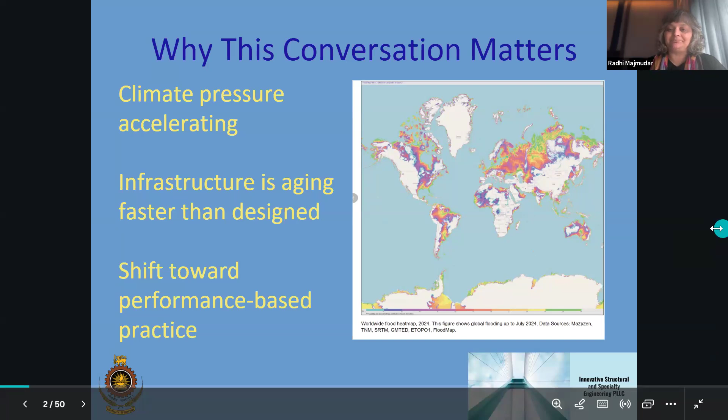Structural engineering today extends far beyond strength and serviceability. We now shoulder responsibility for sustainability - reducing embodied carbon, prolonging lifespans, selecting materials wisely - and resilience, meaning our designs must withstand and recover from extreme events. Sri Lanka's recent hurricane-level storm shows us how important load paths, anchorage, foundation robustness, and redundancy truly are.

At the same time, digital integration is becoming unavoidable. Sensors, real-time monitoring, machine learning-based demand prediction, and digital twins are transforming how we manage structural performance. As emerging engineers of Sri Lanka, you will navigate these overlapping domains, and your ability to integrate them will define Sri Lanka's infrastructure future.

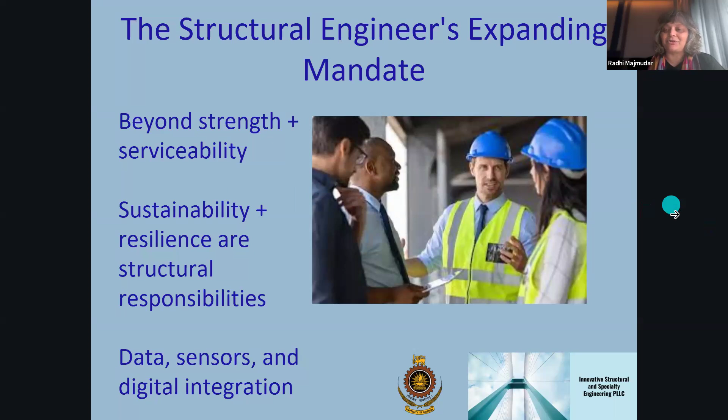From prescriptive to performance-based design: for decades, most countries relied heavily on prescriptive codes - fixed formulas, minimum reinforcement, allowable stresses. But climate variability, urban complexity, and longer operational expectations are making prescriptive rules inefficient or insufficient. Performance-based design is growing globally because it allows engineers to tailor solutions to anticipated hazards, user needs, and long-term outcomes. Owners increasingly want measurable metrics - reduced maintenance cost, reduced carbon, better service continuity, and shorter recovery times after disasters.

ASCE COS 73 is part of this shift. It asks us to define sustainability and resilience goals at the beginning of a project, and then to prove through documentation and analysis that the design meets these goals. Sri Lanka's ongoing recovery absolutely aligns with this approach.

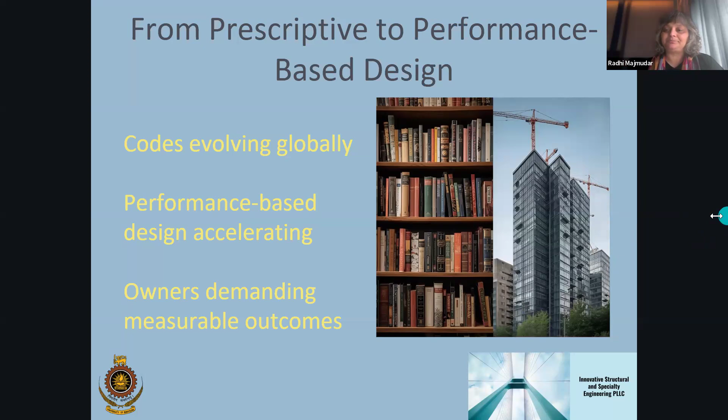The built environment is under intensifying pressure from all sides. Climate hazards - cyclones, extreme rainfall, coastal flooding, heat waves - are increasing in frequency and magnitude. In Sri Lanka, the combination of dense urban development, floodplain encroachment, and steep terrain amplifies failures. The recent storm exposed how secondary effects such as drainage blockage, soil saturation, and cascading slope failures can multiply rapidly.

Meanwhile, society expects longer facility lifespans, yet structures worldwide are degrading faster due to environmental stressors. This mismatch forces structural engineers to rethink durability, maintenance planning, and material selection. The solutions must extend beyond strengthening structures - they must include systems thinking across drainage, land use, social vulnerability, and climate projections.

Whoops, I'm trying to - there we go.

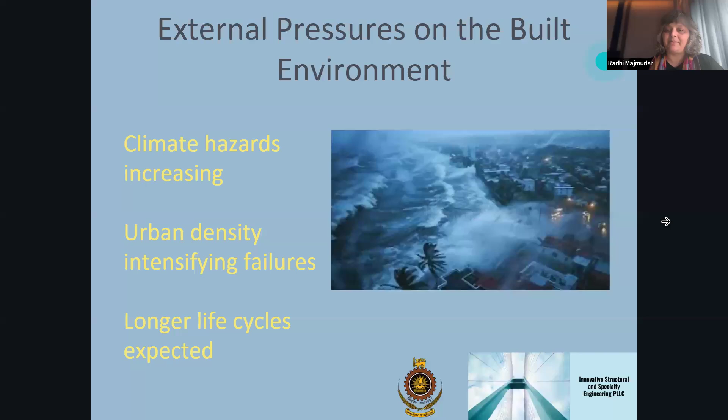So here's today's session. First, I'll discuss sustainability in structural engineering - what it actually means for material systems and design decisions. Then we'll look at resilience strategies and how to design for hazard uncertainty. Then we'll explore ASCE COS 73, the new global sustainability and resilience standard influencing procurement and design practices worldwide. Finally, we'll connect these concepts to Sri Lanka's recent storm impacts and how digital tools can support climate adaptation. Each of these sections is linked, and together they form a framework for the next generation of structural engineering.

Whoops, having trouble moving the slides.

There we go. All right, so here's a little bit about my background so you understand the perspective that I'm bringing. I guess we all have our own perspectives and our own exposures and experiences.

So I have been practicing for 35 years, and I've had the privilege of working across many continents - I would say five continents - on performance-driven projects, from earthquake systems to offshore structures, adaptive reuse, and complex glass systems, load-bearing glass, like the TKTS booth in Times Square, New York.

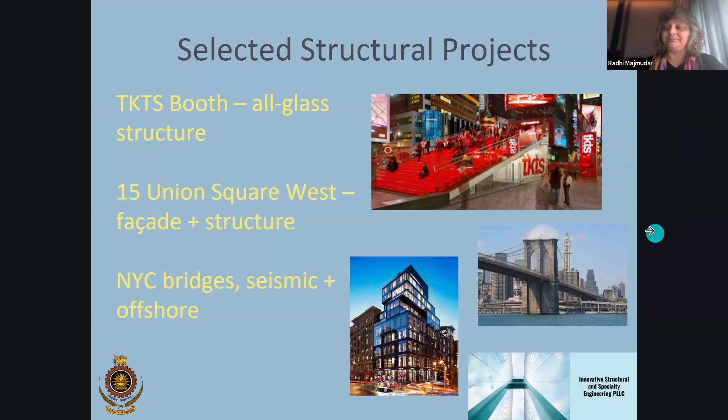After the severe rains and the cyclone that you just experienced this week, we can see the value of nature-based systems—wetlands, retention landscapes, floodable zones—that relieve pressure on drainage networks. When engineered and ecological systems work together, communities gain resilience. These projects taught me the importance of hydrology and geomorphology in engineering, knowledge that is extremely relevant for Sri Lanka as flood events intensify.

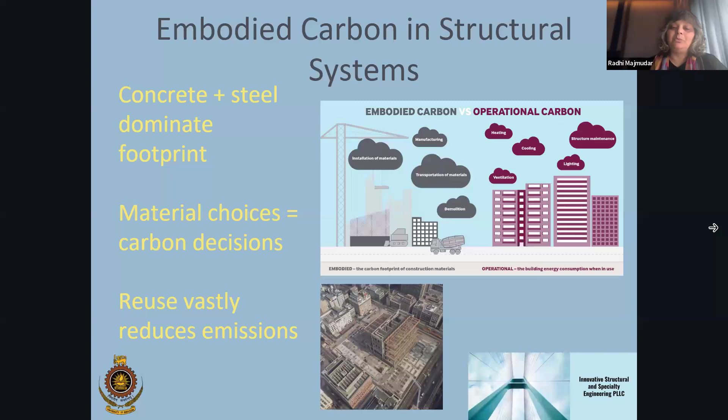Embodied carbon in structural systems: concrete and steel dominate global embodied carbon. As structural engineers, we often control 60 to 80% of a project's carbon footprint through system selection alone. Material choice becomes a carbon decision. One of the fastest ways to reduce emissions is through adaptive reuse: preserve what already exists, reinforce it intelligently, and extend its life. Sri Lanka, after the storm, will rebuild many structures, and embedding low carbon thinking now will pay enormous long-term dividends.

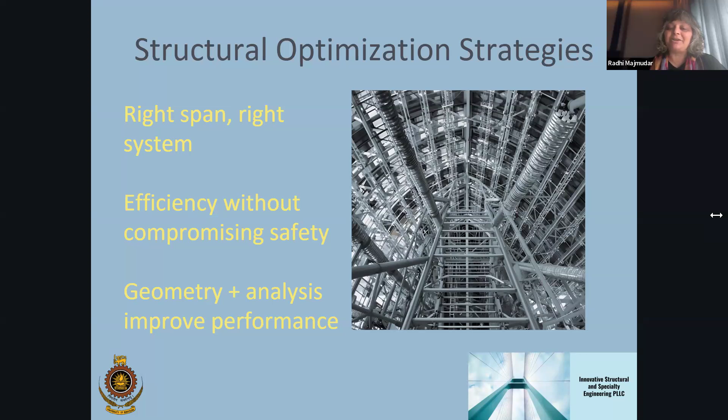Optimization is not about making structures lighter at the expense of safety. It's about choosing the right span, the right form, the right material, and the right load path. When geometry and analyses are used intelligently, especially with digital tools, we can improve performance while reducing carbon. Parametric design, automated load path analysis, and machine learning informed design exploration allow us to test hundreds of possibilities quickly, something earlier generations could not do.

Adaptive reuse and retrofit are often where structural engineers can make the largest sustainability impact. When we preserve an existing frame and upgrade performance, we avoid the carbon and disruption of demolition and new construction. The structure becomes a kind of carbon bank that we continue to use. For designers, this means learning how to evaluate existing capacity, identifying bottlenecks, and introducing new load paths or stiffness only where needed. It may involve new diaphragms, supplemental bracing, local strengthening, rather than wholesale replacement.

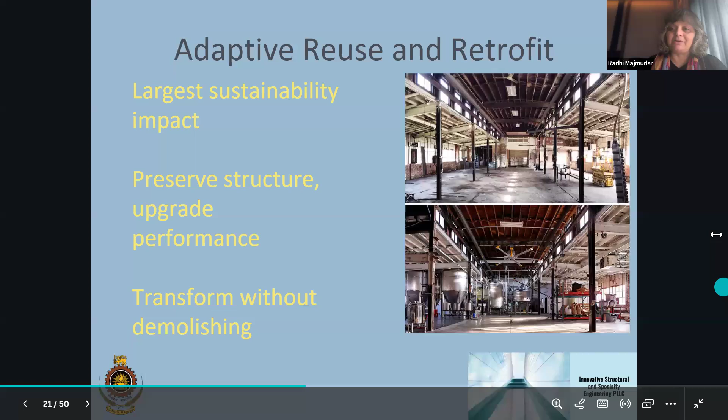So long-term performance is where many otherwise well-designed structures fail. Corrosion, moisture ingress, fatigue, poor access for inspection can all shorten service life. For a coastal and monsoon climate like Sri Lanka, detailing is as important as member sizing. As structural engineers, we influence durability through cover, drainage paths, coating systems, joint details, and we influence maintainability by providing safe, logical routes for inspection and repair.

COS 73 and similar frameworks ask us to think about performance over decades, not just on opening day. If you design with maintenance in mind, clear inspection points, replaceable components, realistic access, your structures will perform better and cost less over their lifetime. Durability is not an add-on, it's a core part of resilient and sustainable design.

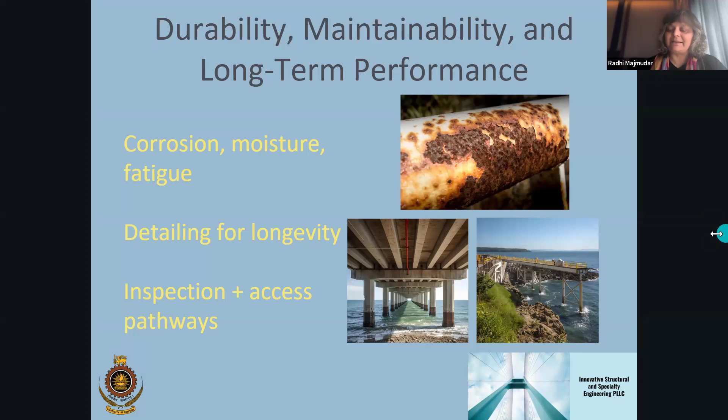Systems thinking, right? So structure, envelope, site conditions. No discipline works alone anymore. Structure, envelope, and site hydrology all interact. The recent storm showed that even if a frame is strong, failures in drainage, cladding, or grading can still put occupants at risk. Systems thinking asks questions like, how does water move across this site? How does the wind interact with roof and wall details? How does thermal movement affect structural joints?

So by collaborating early with architects, mechanical engineers, and landscape designers, we can design details that work together instead of against each other. For example, roof drainage and overflow scuppers are both structural and civil issues. Retaining walls are both geotechnical and structural issues. When we embrace integrated design, we dramatically reduce the likelihood of surprise failures during extreme events.

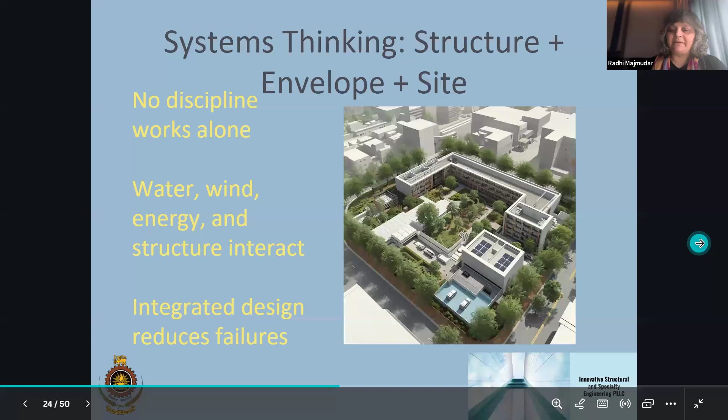Okay, going back to my project examples. So these ideas that I mentioned are not theoretical. Right, so the TKTS booth in Times Square used innovative materials, glass as the main load-bearing structure, to create an aesthetic yet efficient system. At 15 Union Square West, we combined adaptive reuse with new structural interventions, preserving the existing iron frame while adding contemporary residential and commercial functions, which included a double facade, incidentally, on the existing structure and also the 3 stories that were added to the top.

The Staten Island Bluebelt, which I mentioned already, is another example where nature-based stormwater management works hand in hand with structural elements like culverts and retaining structures. Each project approached sustainability differently through materials reuse or landscape scale hydrology, but all relied on structural engineers thinking beyond conventional boundaries. The message is that sustainable structural design can be bold and creative while still grounded in rigorous analysis.

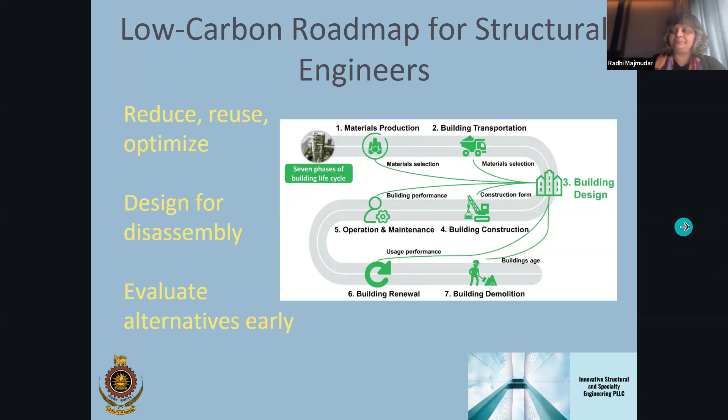What is climate resilience? It's the ability to withstand, adapt to, and recover from climate-driven events. For structures, that means more than simply not collapsing. It means maintaining or quickly restoring function, limiting damage, and protecting occupants and critical operations. There's also a community dimension. A resilient hospital or bridge keeps the essential services operating when people need them the most.

Importantly, climate resilience goes beyond minimum performance. Codes are often based on historical data. Resilience asks us to design for plausible future scenarios that may exceed those baselines. In a country like Sri Lanka, with cyclones, extreme rainfall, landslides, and heat, resilience must become a central design objective, not a special feature.

To design resiliently, we must have a clear view of the hazard landscape, right? Here, the key categories include wind and cyclone effects, extreme rainfall and flooding, earthquake hazards, heat, and the compounding or cascading effects among them. For example, heavy rain may trigger slope failures, which then compromise foundations or lifelines.

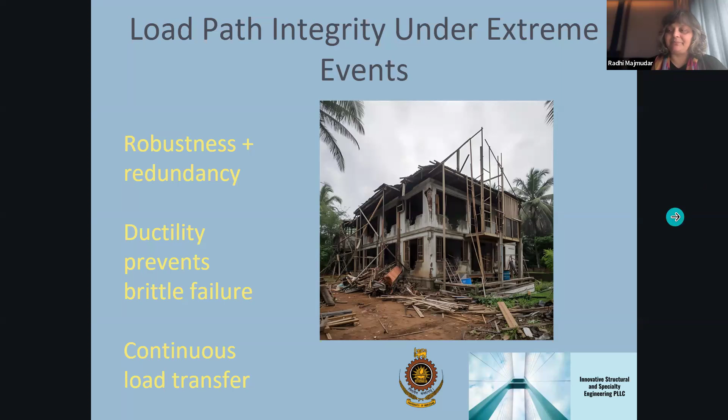For us, structural engineers, this translates into continuous load paths from roof to foundation, reliable diaphragm action, well-detailed connections, and attention to alternate load paths. In cyclonic winds or flood uplift, failures frequently start at the roof to wall or wall to foundation interface. Strong continuous connections may not be visually dramatic, but they are central to resilience. Thinking through what happens if this member is lost is a powerful design habit, right? Looking for that redundancy.

So let's talk a little bit about my exposure to bridges and fixed offshore structures, and perhaps how that shaped how I think about resilience. Bridges and offshore platforms operate in extreme environments, continuous wave loading, strong winds, saltwater corrosion. Sometimes, depending where it is geographically, earthquake effects. Some offshore structures that I had been exposed to in the past had heights comparable to the Empire State Building, with most of that structure existing below the waterline. So you couldn't even really visually appreciate the height of that structure because you couldn't see it, because not that much protrudes above the waterline.

So designing for these conditions requires careful hydrodynamic analysis, fatigue checks, redundancy in framing, and continuous monitoring. When hazards are high, you can't rely on a single line of defense. You need multiple layers of robustness and an ongoing understanding of how the structure is aging. These same principles are increasingly relevant for coastal and riverine infrastructure in Sri Lanka.

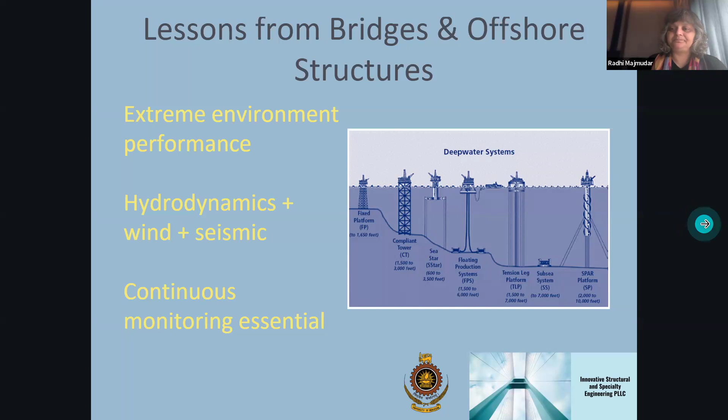Uncertainty is now a defining feature of our design environment. Future rainfall, wind speeds, temperature extremes, and even usage patterns are harder to predict than in the past. Designing for uncertainty means using probabilistic checks, scenario analysis, and stress testing beyond minimum code requirements. We can ask, how does a structure behave if loads are 20 or 30% higher than design basis? What if two hazards interact? For example, flooding plus wave impact. Digital tools make it possible to run these scenarios efficiently. We may not design for every extreme, but exploring the response gives us insight into where we need additional robustness, redundancy, or protective measures.

COS 73 turns resilience from a general aspiration into a set of explicit requirements. It calls for hazard identification, documenting which hazards are relevant to the project using the best available data, resilience performance targets, meaning defining how the asset should perform under different levels of event intensity, including functionality goals and acceptable damage states. Documentation and verification shows how the design, construction, and operation strategies meet those targets. So for Sri Lanka, adopting this mindset would mean that flood walls, bridges, public buildings are designed with a clear, traceable resilience objective. It also makes communication with stakeholders easy. Everyone understands what level of performance is being promised and why.

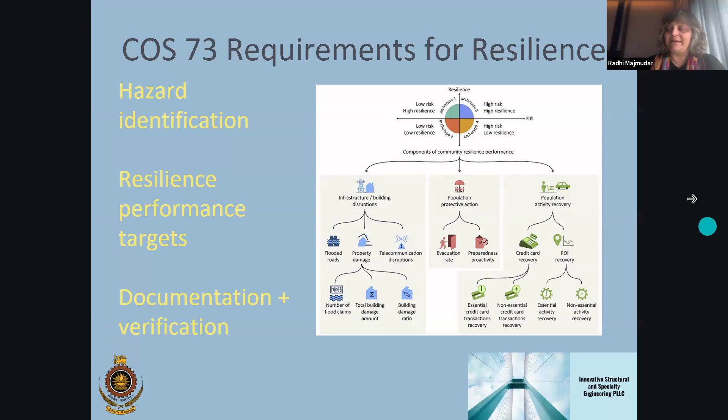Cyclone Ditwah is a sobering case study. Within hours, parts of Sri Lanka experienced severe flooding and destructive winds. Roofs were lost, retaining walls failed, and multiple districts suffered landslides. Transportation networks, schools, and essential services were disrupted, and thousands of families were displaced. This event is not an anomaly. It is part of a pattern of intensifying climate stress. For us as engineers, Cyclone Ditwah is both a tragedy and a data point. It reminds us that design storms based solely on the past may be inadequate. It also shows the importance of drainage planning, slope stabilization, robust roof anchorage, and continuity of critical facilities such as hospitals and emergency centers.

So, a storm exposes specific vulnerabilities. Weak drainage networks and floodplain encroachment lead to water backing up in areas that should have remained dry. In some neighborhoods, roof uplift and wall failures indicated that connections and detailing were not adequate for actual wind pressures. In the hill regions, steep slopes, altered vegetation, and uncontrolled runoff contributed to landslides. You can correct me if I'm wrong later. This is based on my readings and observations. And by the way, the landslides are not just geotechnical issues, they're structural and planning ones as well. By studying these failures carefully, Sri Lanka can prioritize retrofits, update local codes and guidelines, and adopt more stringent requirements where patterns of failure are clear.

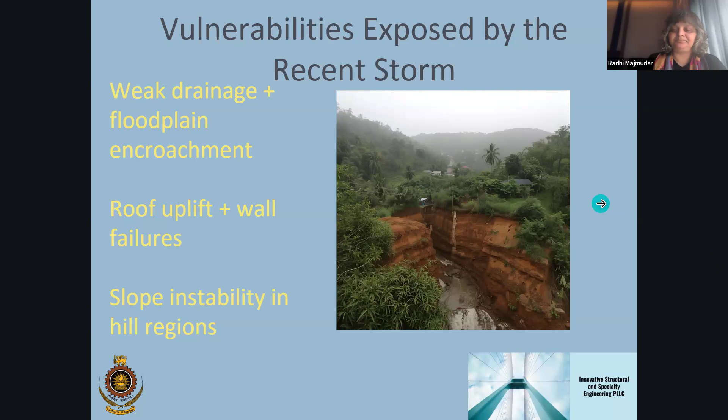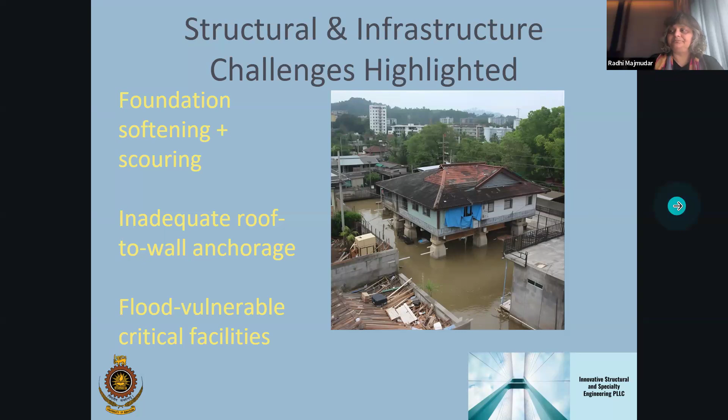So this is where ASCE 73 can be particularly powerful for Sri Lanka. The standard encourages hazard-specific performance targets, life cycle thinking, and integration of resilience into procurement. For example, an RFP for a new hospital could explicitly require functionality after a 100-year flood plus wind speeds associated with a major cyclone, along with a life cycle cost analysis of different structural options. So it also encourages adaptive design, structures that can be evaluated, elevated, strengthened, or extended as conditions change.

If Sri Lanka used ASCE 73 principles in its reconstruction programs, the country can move from repairing damage after every event to building an infrastructure portfolio that is progressively more robust and climate ready.

Digital tools can greatly enhance climate adaptation. Sensors and structural health monitoring provide real-time data on how assets are performing. Digital twins of drainage networks and structures allow us to simulate intense storms and see where water or loads concentrate. Forecasting systems combine rainfall prediction with topography and soil data to give early warning of floods and landslides.

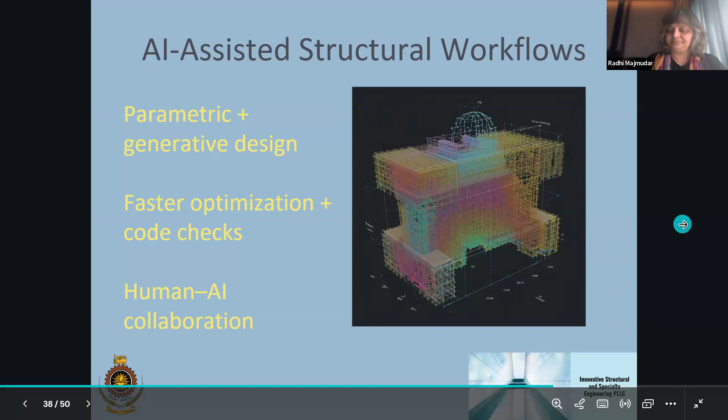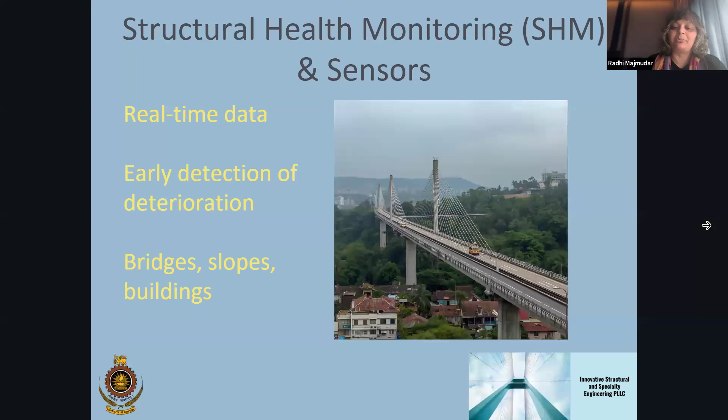For Sri Lanka, priority candidates for SHM include key highway and railway bridges, critical retaining structures, and slopes above populated areas. Data from these systems can feed into risk dashboards, informing both engineering and emergency management decisions. When combined with AI, SHM can automatically flag abnormal behavior and help prioritize interventions.

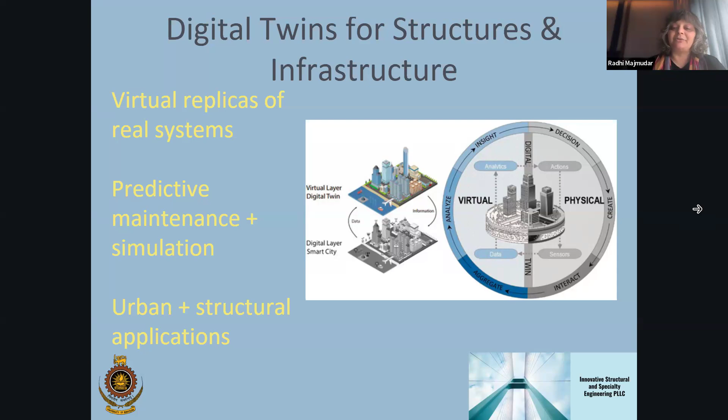With the digital twin, we can simulate scenarios, such as a 100-year storm, and visualize where stresses, deflections, or flood depths will be highest. After an event, we can compare monitored data with the model to identify potential damage. For Sri Lanka, digital twins of key corridors, coastal defenses, and urban drainage systems would be powerful tools for both planning and real-time response.

IDEs, integrated data environments. IDEs pull information from many sources: design models, SHM sensors, inspection reports, climate data, into one single coherent platform. Instead of each discipline keeping separate spreadsheets and drawings, an IDE allows everyone to work from a shared source of truth. This improves accuracy, reduces conflicts, and supports better decisions over the entire life cycle.

For Sri Lanka, an IDE could link structural models, geotech data, and hydrologic models, helping engineers understand how changes in one domain affect others. It also sets the stage for advanced analytics and AI because the data is organized and accessible.

The next generation of structural engineers will need three broad skill sets. First, mastery of mechanics and materials. This remains foundational. Second, digital fluency: comfort with modeling, data, and AI-assisted tools. And third, sustainability and resilience literacy: understanding carbon, understanding LCCA (life cycle cost), hazard analysis, and community impact. Engineers who can operate at the intersection of these three domains will be in the highest demand.

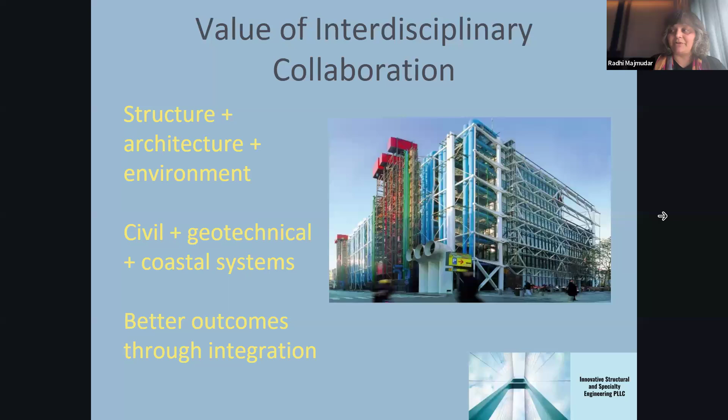At your university, you have the advantage of multiple strong departments in one campus. Work with peers in architecture, transportation, coastal, and environmental engineering. Take advantage of the fact that you're in proximity. The more comfortably you work across disciplines, the more effective you will be in delivering resilient, people-centered infrastructure.

At its core, engineering is an ethical profession. Our decisions affect lives, ecosystems, and public resources for generations. With climate stress increasing, our responsibility is expanding. We must consider not just whether a design meets today's code, but whether it is just, equitable, and robust enough for tomorrow's conditions.

So this includes speaking up when we see unsafe practices, resisting pressures to cut corners, and advocating for solutions that protect vulnerable communities. The structures you design will stand long after today's political and economic debates have faded. The ethical choices you make now will shape the world your children and grandchildren will inherit.

So, to summarize, sustainability is a structural issue. Our material choices, systems, and reuse strategies strongly influence carbon and resource use. Resilience requires forward-thinking, hazard-aware design that goes beyond minimum code compliance. And digital tools, from AI to SHM and digital twins, are transforming how we analyze, monitor, and manage infrastructure.

For Sri Lanka, integrating ASCE 73 principles, climate-aware design, and digital innovation offers a pathway to infrastructure that is safer, more durable, and more equitable. These are not separate themes; they reinforce one another and define the future of our profession.